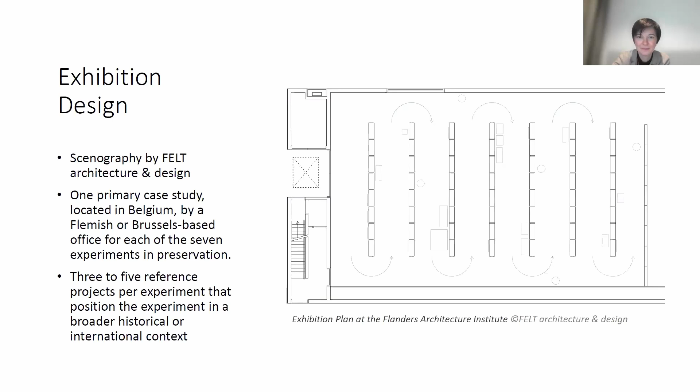And what they did was to take out the planks in the floor, which were loose, to make connections. So they brought them up. They did the same for the ceiling panels that were movable. And these two elements were connected with very small iron wires to create the walls on which the 7 experiments were exhibited. And all the other materials used for the scenography, the frames, the sockles to present the models, everything was taken from the storage of De Singel from earlier exhibitions. So there was no new material added except for the iron wires on which the frames were hung.

And this creates also an interesting spatial experience of the room. Also the lights, they lowered them to create a sort of ceiling. So a very distinct spatial experience, actually, by just the reorganization of what was already there.

To explain to you a bit the projects that we used to illustrate the different strategies, I will walk with you through the book. I will not elaborate on all the pages, so sometimes I will just click through, but then at least you get a sort of impression of the exhibition catalog. So here you see the cover showing a detail of a project by Korteknie Stuhlmacher Architecten, Callebaut Architecten en Bureau Bouwtechniek in Mechelen. I will show it later in the presentation.

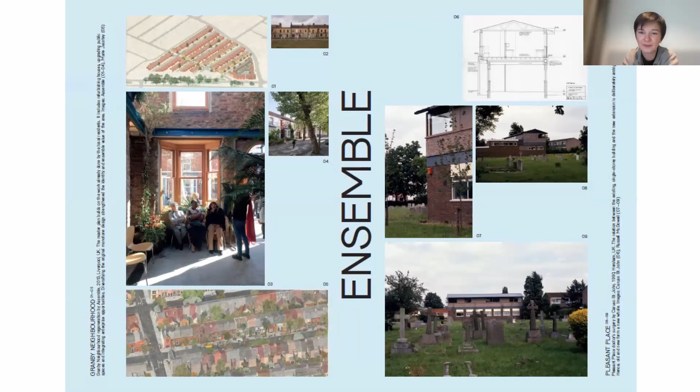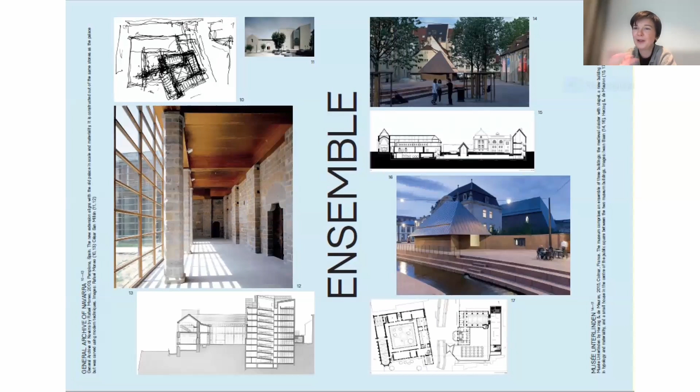May I ask something, Bie? How did you make the choice for these reference projects? Because I can imagine there were many. Yes. How were the ones for the book or the exhibition picked? I think that the reference projects for us as curators were most difficult to select. Yes. Because we started from long lists.

Also, the selection of the projects in general, it was a bit back and forth between selecting projects and formulating strategies. So that went in a direction. But the main projects, the Belgian projects, I found less difficult than these reference projects, because they aimed to broaden the scope. So we tried to show these different scales that I referred to. So to show projects that work on different scales, also different regions. So to move beyond Flanders, but also show projects from elsewhere in Europe, and also to a certain extent outside Europe.

And then also because we didn't have much space, so to say, to elaborate on the project, it should also be very clear and obvious, because sometimes we had very interesting projects that were difficult to show the strength of the intervention in three pictures. So that was also sort of a pragmatic choice criterion, a sort of educational one, like how can we bring the most of it.

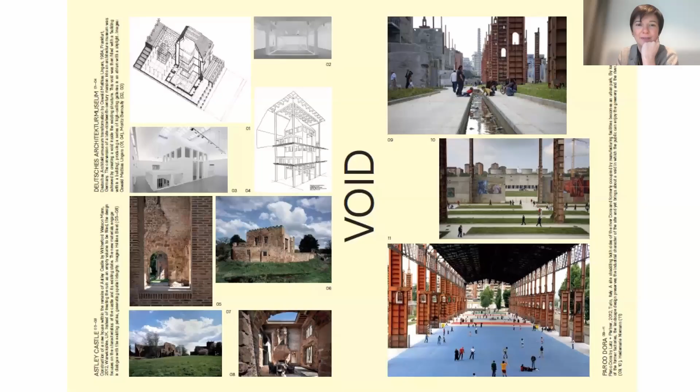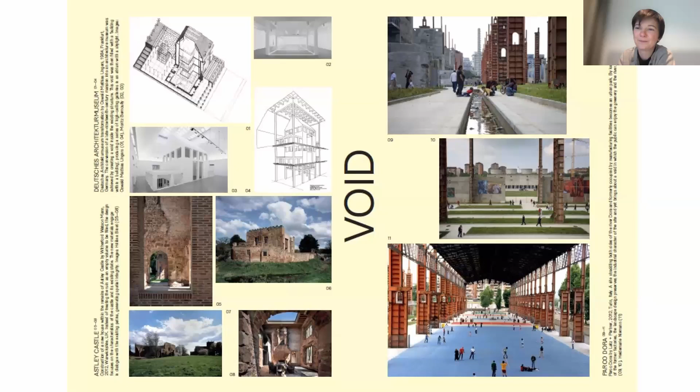Here again, some other pictures. That's Void. As I said, works with creating or removing as a design tactic. For example, this project by Peter Latz in Turin, where actually a lot of the existing fabric of the former industrial site is removed. But by doing so, what remains becomes really strong and iconic, and also is very extensively used by people in Turin.

And the project that we chose for Void, this is an essay by Jonathan Hill, is Chapex in Charleroi. At the time that we published the book, the project was not finished, so we showed construction pictures, but to illustrate the strategy, that wasn't really a problem. But if you're interested in the project, there are new pictures which are also really showing even another layer than what we were able to show back then.

So Chapex was located in Charleroi. It was used as a location to organize fairs. It's 60,000 square meters. It was an enormous building that needed to be renovated. At the time it was built, Charleroi was really in its economic heyday. Today, that's really not the situation anymore. So the building became actually too large for its function.

So this is a project by AgwA and Jan De Vylder and Inge Vinck, with a lot of other collaborators as well. And what they proposed, because the budget to renovate the building was too limited to renovate it entirely, they renovated a small portion of the building to an extent that it could be heated to an indoor climate. Other parts were renovated, but to be used unheated.

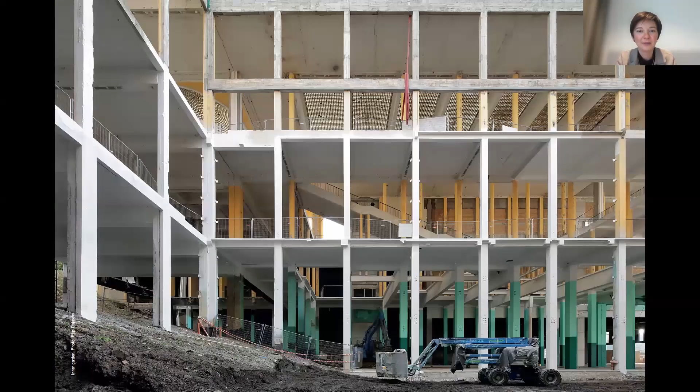And then yet another part, the middle part, was stripped of its facade and walls, and only the main structure was kept, so the structure and the roof, creating a very open space that could be used for all sorts of functions. So it was not really formally programmed. It can be used for informal sport activities in the city, flea markets, as an extension of the fair, but then outside.

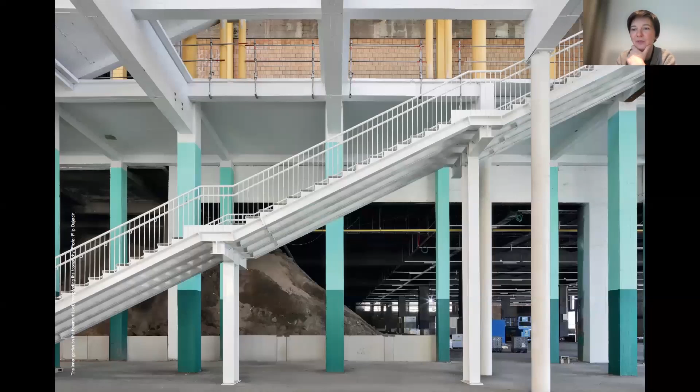And here you can see some images of how this building originally looked. Here you can see some images of this middle portion. So there are stairs added to connect the different floors. While they were doing the renovation, there was already the potential of this space, because it was also creating new urban connections, because this very large building originally separated two parts of the city. But by opening up the middle part, a new urban connection was created.

And therefore the bouwmeester, because it was a project that was coordinated by the bouwmeester of Charleroi, also really recognized its potential and tried to find the funds to also develop a landscape project within. So although it was not part of the original competition design, even before that competition design was fully executed, there was already a follow-up project to make a landscape intervention, showing how this act of removing, of opening up spaces, can also show a potential almost immediately.

And here you can see some drawings and some more pictures. Maybe to say something about the interior, there is also a very beautiful intervention which we didn't show in the exhibition because at that time it wasn't finished yet, by Doorzon Interior Architects, and what they did is to make new furniture with building materials and fragments that were removed at the site.

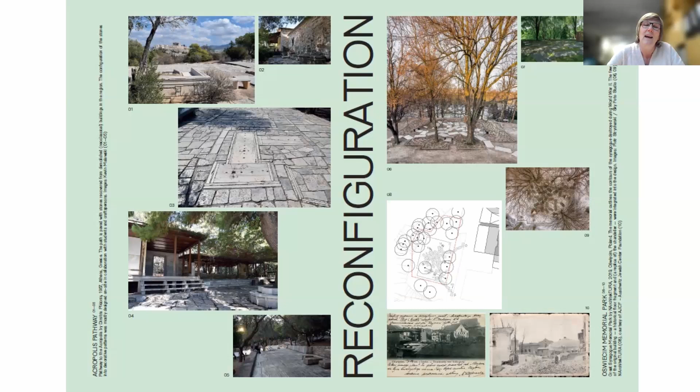So it's our statues that were previously exhibited in public space at roundabouts or on buildings, etc., but that were removed from their urban location, often because of practical reasons, renovation works, for example. But many of the statues, if we look at them now, also tell stories or narratives that today we feel do not belong anymore within the public or shouldn't be celebrated within the public space, such as, for example, statues reminding of the colonial past of Belgium and also celebrating that colonial project. So several of the statues also reminded of that.

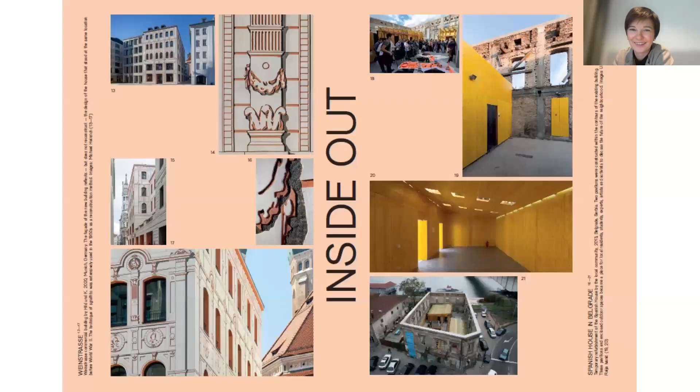Actually, there were many other sculpture groups I could talk about, also about Leopold II, but I will not go in depth here. Bie, can I add something? Yes. What was interesting in the book also was referred to was the idea of spolia. Could you explain a little bit more on that in regard to this approach of reconfiguration? Yes.

I think this idea of spolia was mostly related also to the reference projects, because this concept of spolia refers to practices in the late Roman era, where elements, usually marble fragments, decorative iconographic fragments, were reintegrated in new buildings, also as an act of reuse for pragmatical reasons, but often also to transmit meaning from one site to another. And it's a practice which actually did not only occur in the late Roman Empire, but which continued to be used, especially, for example, in Rome, in early Christian churches, you see that a lot, actually up to the Renaissance.

It was usually related to marble fragments because of the quality of the marble material. So it was definitely an ecological or economical reason. But for example, for the Santa Maria in Trastevere, this church, when it was renovated in the Renaissance, they used some of the columns from the baths of Caracalla, which were also at the time a very important ruin in the city of Rome.

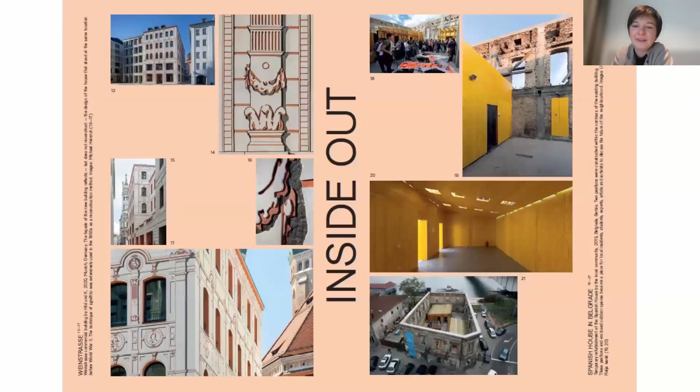Yeah, this project by Bart Hollanders, what they did was to actually rethink this modernist idea of the facade as the expression of what happens in the interior. They kept the facade of the building and they adapted the plan to the rhythm of the facade. So they used the doors and the window openings as a grid to organize the interior.

And also now that this project is already further developed, when it will be finished, I think the interior will be really interesting. Wait, I want to show one picture. For example, they work a lot with colored bricks.

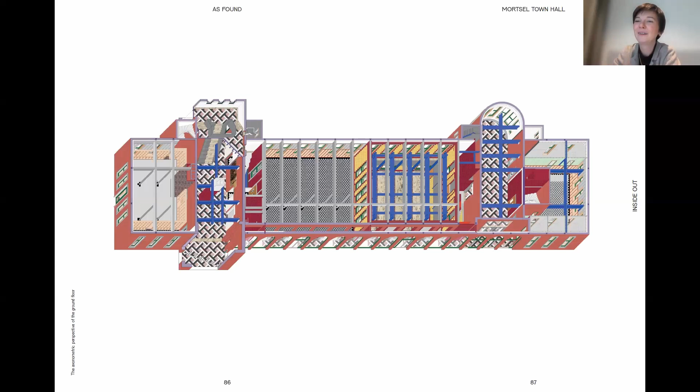And this is a material that you usually find in Belgium a lot for facades, especially Art Deco facades, this emaille colored brickwork. And that is something that they use here on the interior. So it creates an ambiguity between interior and exterior character, or expressions, in a very interesting and intriguing manner, I believe.

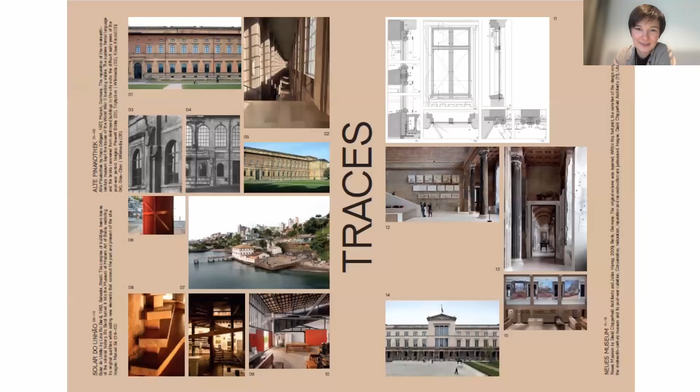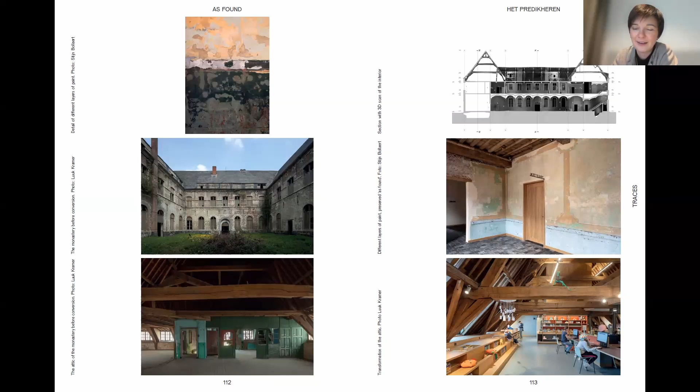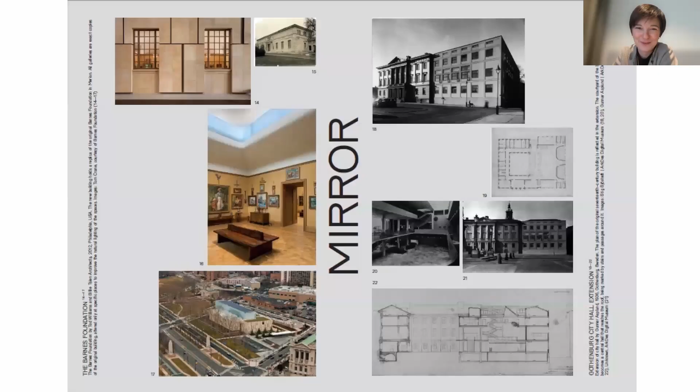And then for Mirror, we showed two projects by the same office, a renovation project by Robbrecht en Daem and a new building by Robbrecht en Daem. The renovation project was of the Boekentoren building by Henry van de Velde, one of the important early 20th century, early modernist architects in Belgium.

They renovated this building, and while they were working on this project, got a commission to design an archive a bit further away. And you see that they really borrowed a lot of characteristics from the Henry van de Velde project and implemented them in the Rijksarchief. And it's both on typology and organization, as well as on interior layout and finishings.

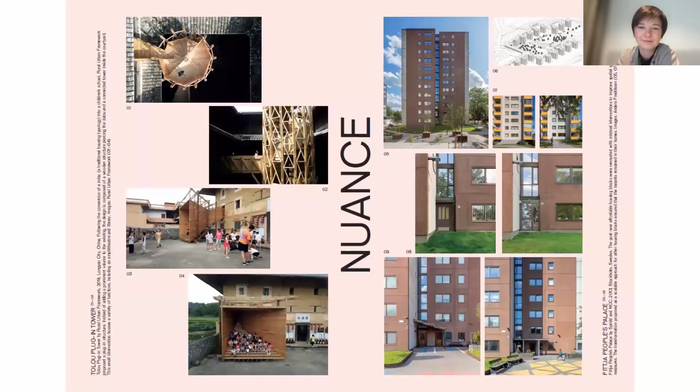And then the last project, Nuance. There we chose a project by Carton123, a youth center in Brussels. And the intervention is really minimal. It was a project that was developed a lot through participation. It's actually just the ground floor of this building that is renovated.

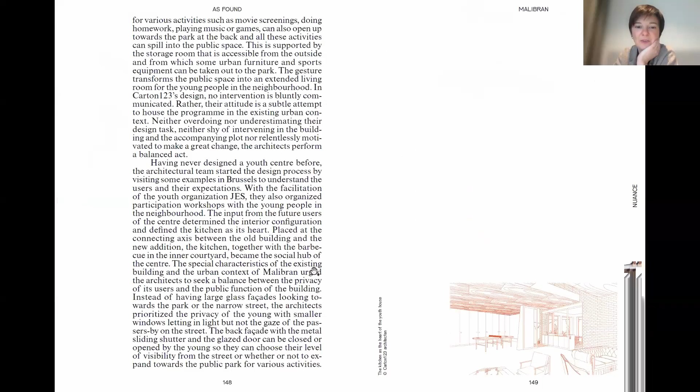And it's through participation that they found that the kitchen was a very important element for the youth in the neighborhood. They really wanted to gather around the kitchen to eat together. And that's how it got a really prominent place within the youth center. And they also extended it to the exterior, where they made a small barbecue place.

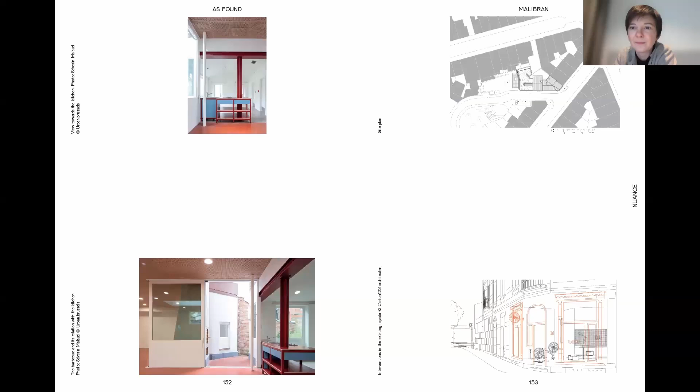In this project, they also had to think about privacy and openness, and all these design decisions were informed by this participatory trajectory. Inge, I think we managed to go through all the projects.

The last ones a bit more quickly, but yes. It gives already a very fine overview of the different projects and the approach of the complete exhibition and book, I think. So thank you very much, Bie.

Do I stop sharing? Oh no, we can keep it as a background, I think.

Maybe I have some questions for you. Graham is joining us too.

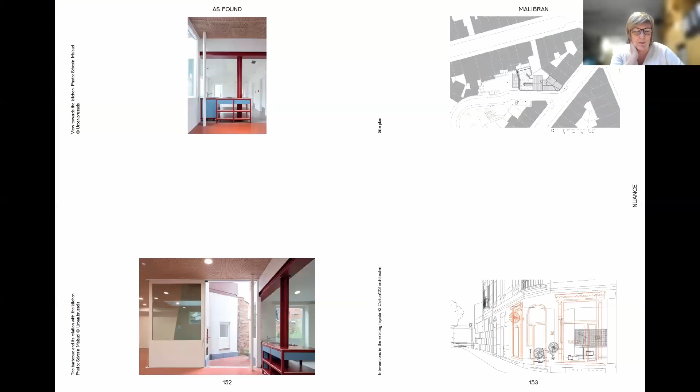An interesting part in the book I found was at the end, the discussion with the experts in transformation. And what struck me was that at one point the experts were talking about a kind of paradigm shift within heritage as well as in architecture. Maybe we can talk a little bit about that. About heritage, they said that at the moment heritage is far more broadly defined than it was before, and that makes it possible to do other kinds of transformations than in the past.

And in regard to architecture, there was a bigger focus of architects at the moment on urban projects, difficult urban projects in sites that were not always that accessible or difficult to transform. And there is a growing interest for architects to dive into these kinds of projects and transformation more than in the past. Is that something that you can subscribe to? Is that something that you also see in the evolution of the years that you've been working on these themes?

Yes, I think working with the existing, both heritage and non-heritage, especially in a context like Belgium, has become the new normal, so to say. Sometimes I'm really wondering how much relevancy there still is. When we were starting the research group focusing on adaptive reuse, and for Graham it was even stronger because he has been working on the topic longer than we have, it was unusual, and it was something that really had to be promoted, while today it feels almost evident that you first consider if it's possible to renovate rather than to build anew.

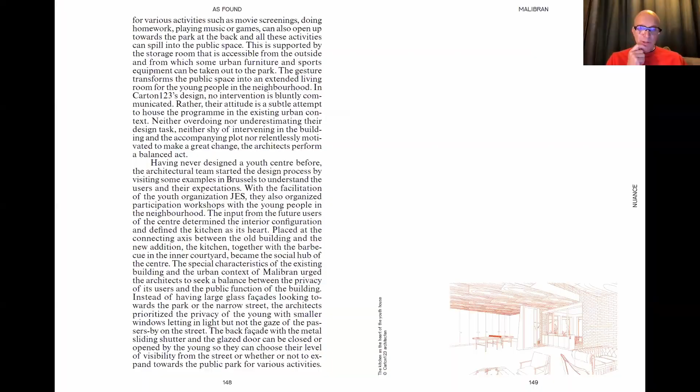I think so. And I think it's really interesting, isn't it? Because I'm conscious that every time we talk about building reuse, heritage, preservation, all of these wonderful terms, sustainability as a word has been around for a while. And I tend to think of it as just being totally implicit in every aspect of reuse, heritage, preservation, reconstruction, conservation. And every now and again, when doing talks like this, I quite often get this question: well, what about sustainability?

And I never see them as separate. I always imagine that it's exactly the same as what we're talking about. So it's interesting that people are still saying, what about sustainability? And maybe we have to always be quite explicit that all of these practices are completely sustainable because they're using stuff that's already with us rather than new build and starting from scratch.

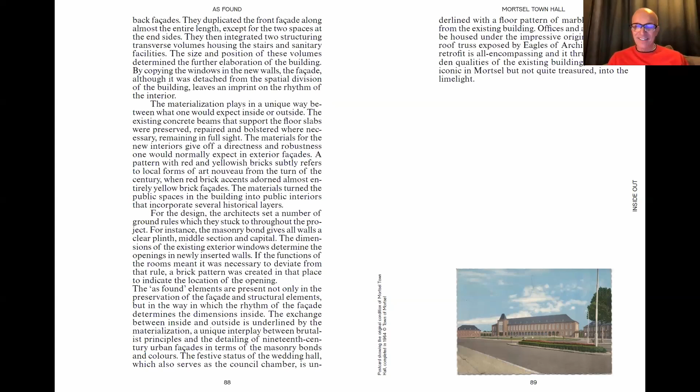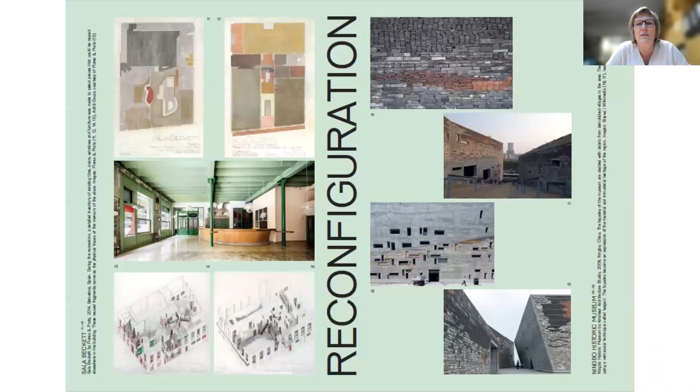Could it be that it is a focus on technological sustainability more? Might be, yeah. And maybe the question is on that, and that's really complicated sometimes. If you want to do a transformation, you have all these techniques and all these requirements at the moment for having these technologically sustainable systems. And to implement that in the building is quite an ordeal sometimes, no?

Yes, I think that's what they struggled with at first at Chapex. With the budget they had and the enormous size of the building, just to renovate the roof at an acceptable cost, they didn't even have enough budget to do that. So the way the building could be used also resulted from the conditions that were there. Okay, we can use a part, but unheated.

And that's even, if you just don't heat space, that's even better than heating and insulating. And so also I think, and that's maybe something that there was in the Chapex project, but I think there are many adaptive reuse projects that somehow rethink the relationship between interior and exterior space for internal comfort, so to say. Formerly interior spaces that were meant to be heated towards interior comfort become spaces that we use unheated or only with daylight or different kind of

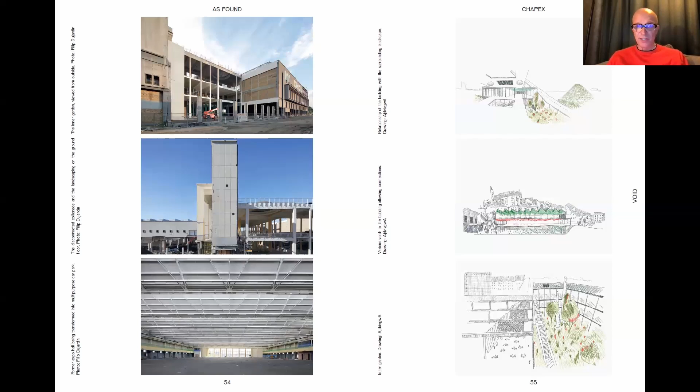Thanks. In Belgium, for example, a lot of projects go via the bouwmeesters. For a public project there is an explicit question to do participation, but often it is more ticking a checkbox than really influencing the design. So that's why we really liked the Chapex project, the youth house, because there we felt when we were talking to the architects that it was really the conversations with the youngsters and

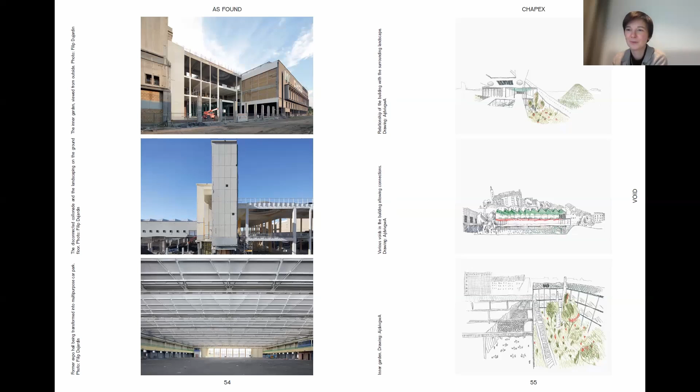also the observations of how they were using, because there was a sort of playground or informal football field just next to it before this project was developed, that it was really from a true engagement with the local community that the project was developed. And that's also why we wanted to include it in the exhibition. But of course, that is not so easy to show, but we try to do so. It's explained in the movie, and also in some of the images that we showed in the exhibition.

For example, for Steen, it's often said that the project was not well received by the public because there had not been enough participation. I don't know if that is exactly the reason for the somehow bad start. Maybe a better communication would have been interesting, because it was covered all the time, and then the covering went down, and it was like boom, this building was there, and a lot of people were shocked because they never saw anything in advance. I think there was a kind of shock effect.

Although there was an exhibition made, and images were published before, in conversations with the architects, what they also said is that on a 3D image or on the visuals beforehand, because there is a very strong similarity between the old fabric and the new, for many people it wasn't so obvious what the intervention would be or what its scale would be, because the contrast is so soft between the old and the new.

Very close to this is the Zaha Hadid intervention at Havenhuis, where you have the Zaha Hadid building on top. If you see an image of that beforehand, it's in your head, you will not forget, it's very obvious what will happen. While here, images had probably been published, but it was still not so clear what that would mean in spatial terms. Maybe it's